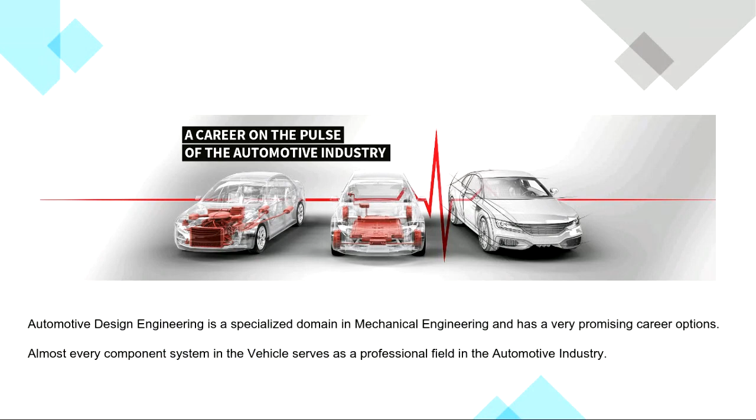So I'll come to some categories I've made. This isn't everything, but some main points from a career point of view. Take for example an automotive company like OEMs - original equipment manufacturers - Maruti, Tata, Mahindra, Renault, etc. They have broadly many departments, but automotive design engineering is mainly concerned with the top 5 or 6 categories I've categorized here.

So: research and development, then quality control, then supply chain, production of course, and product planning and control - it's called PPC. So, research and development.

Some of you have a very keen interest in research and development. Some of you have good skills communicating with suppliers or in marketing. Some of you have great interest in managing things and making things possible. Some of you have interest in managing people, making things happen in a proper, strategic, planned way - that's production and production planning and controlling.

It's called market research, and deciding what products need to be launched, etc. As I've highlighted here, let me bring the pointer in. I hope you can see this pointer. Okay, I was just trying it.

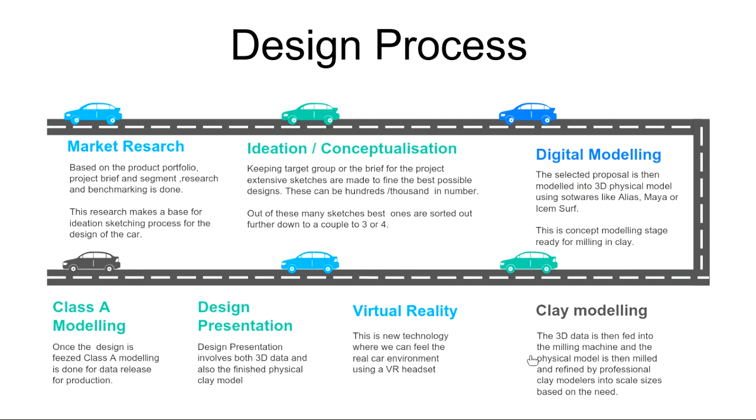So I hope you've understood this brief quite well. Now let's go talk about the processes.

So how is India doing about car buying things? Most of the people in India have multi-car homes, like two, three cars. Not most, but there is a group of people that have multi-car homes, and there is a group of people who use combined car pooling, car sharing.

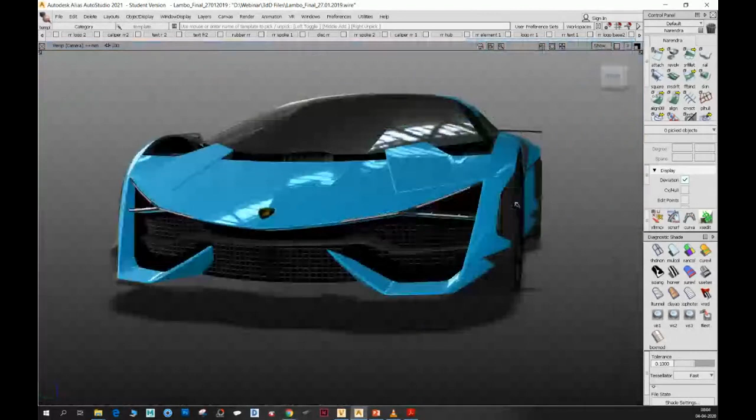Maybe one of you can write in the comment box if you can see the screen movement, can you see the model there? So this is the software I was talking about, and you can see there is a model.

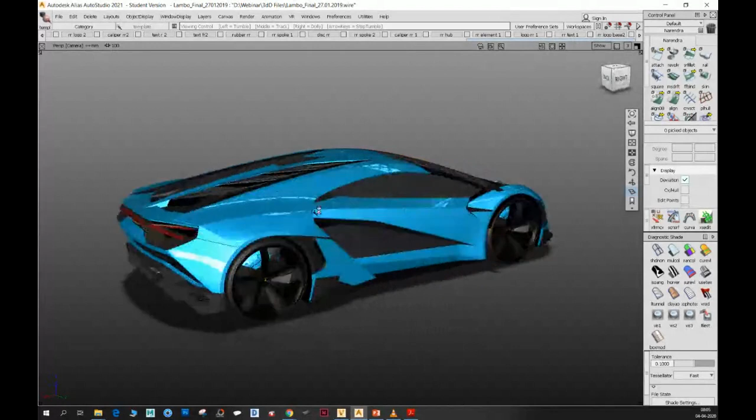This was a Lamborghini personal project. I have modeled it, designed it like this, and this is what we do in 3D modeling. So this is what I mean.

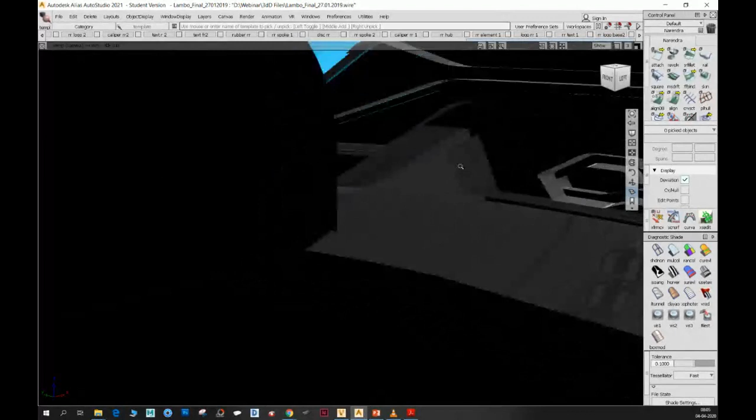So I would show you here the lines, now you can see the edges there. So these are all surface modeling. I was talking to you about surface modeling before. There is solid modeling and then there is surface modeling.

So for example, if I pick up this surface for you, and I will show you what is inside. You see, there is nothing behind it. It's just one surface, zero thickness.

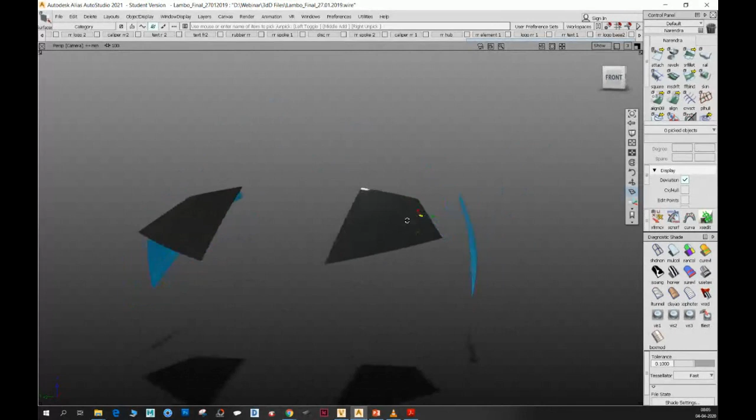And then later on when we go to production, this work is done by the engineers. They do it according to the production parameters, if you want a 3D print or something.

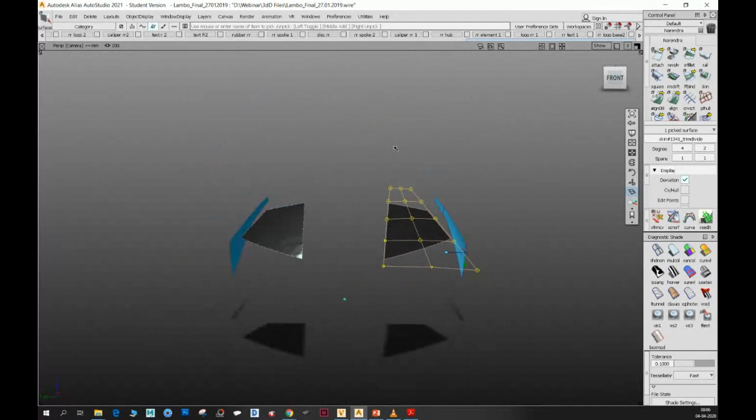So this is the surface modeling, and if you open the technical things in here, you see there are a lot of control points. So we have to design surfaces, you cannot just pull out, and I will show you here.

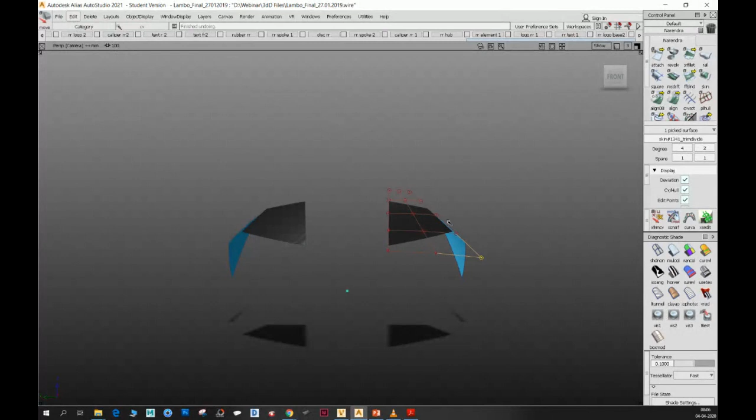For example, this control point, I will move it like this. You see, you can move it like this, and you see the behavior change in the surface. So this is how we do it actually. In design, you have to do 3D modeling based on the design flow, you cannot just do it randomly here and there.

So this is the Autodesk Alias software. I think 70-80% of companies are using the same software to make their models. So I hope you got an idea how it works.

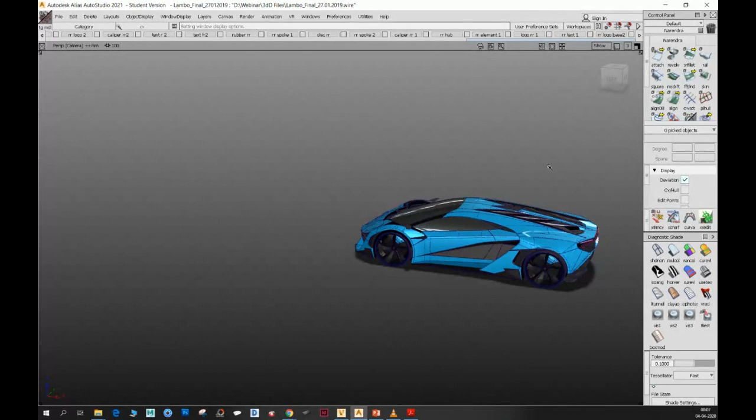And the second thing, the same model, how do we 3D render it? So this is another software, it's called VRED, we call it visualization, 3D visualization. And it's the same model I showed you before, and you see the difference in the shaders and reflections. This is more realistic, you are giving the real 3D feeling in here.

So we have, for example, if I show you here, just to show an example - we have different materials, you can see here, different kinds of materials. And then if I pick and drop, you see there's a material, a metallic body paint, and we just drop it in here, and then it changes the color like this.

So this is what I mean, you have different materials, it's like rubber, plastic, and everything else. Yeah, glasses, you have a glass effect.

So it's a long process actually, it takes a lot of time. For example, if I want to make a high quality JPEG of this, maybe it will take a couple of hours to make one single image. It depends on the performance of your machine, on the configuration of your machine to process these kinds of images.

And then after making the image out of this software, we have further development in Photoshop. Then you do some Photoshop touch up, some fancy things I would say, you do it in Photoshop.

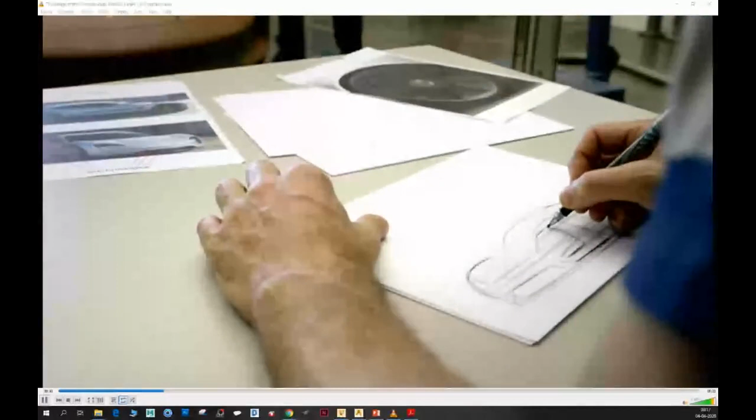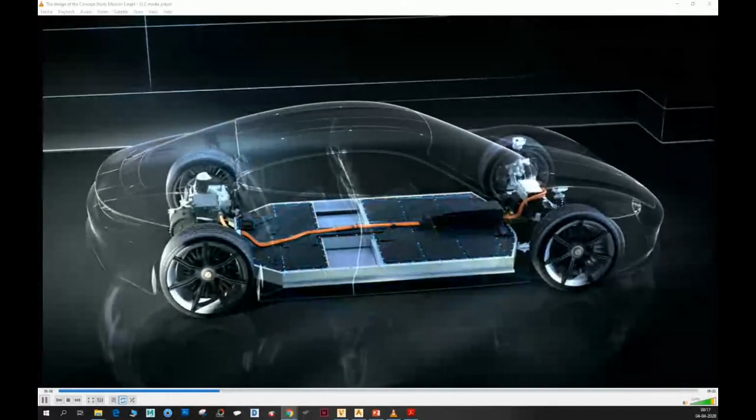This vehicle is Porsche's answer to the questions associated with the future of electric mobility - our Porsche Mission E. This concept car is a truly fantastic challenge for us because it's our first electric sports car. You're commissioned to do a job, in this case to develop a 4-seat sports car with an electric drive system. Then you start producing sketches as a team, and the sketches are shown in presentations made at specific intervals. After a sketch is selected, a 1:3 scale model is produced. When defining the basic concept of the vehicle, you start by setting its proportions, then figure out how to actually build it. We built a basic chassis and combined it with electrical components from the Boxster E, so in the end we had a demonstration model that could be driven.

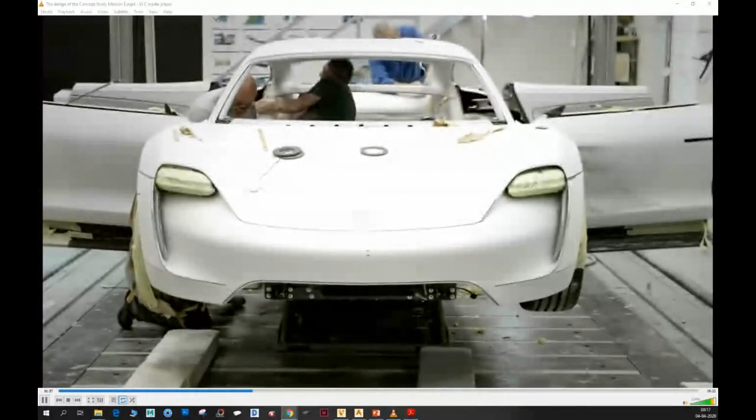It was very important to us to create typical Porsche proportions. We were able to design an extremely low front end because there's no engine in front. We also didn't need huge air intakes, so we designed everything in front in a very clean manner, almost like the old Porsche models from the 1950s, 60s, and 70s. We then mixed this with the wonderful shapes of the 919, and creating this combination of a race car and a carefully designed vehicle was the best part of the job. One thing we thought about was how to attractively integrate an air curtain to guide air around the front wheel. This led to the front-end design we chose, with the classic round Porsche nose flanked by two intakes that let air pass under the headlights towards the wheel arch.

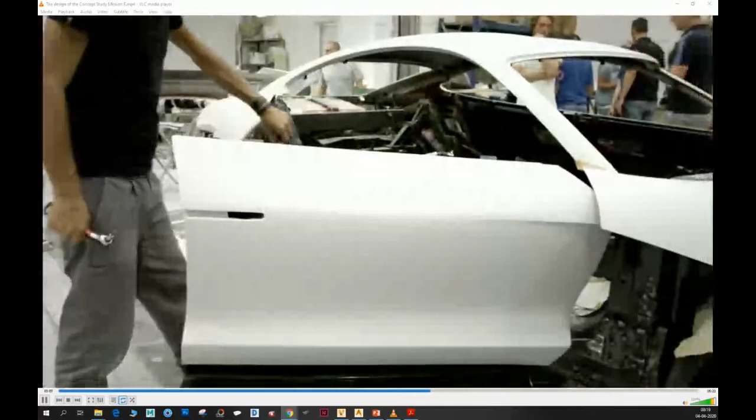First of all, the vehicle is clearly recognizable as a Porsche. But we designers wanted to go a step further and see how the Porsche design language, especially a Porsche electric design language, might be developed further. Our intention was to be somewhat provocative with some parts of the vehicle, but just one look at its proportions and general design shows it's clearly a Porsche. We also addressed a couple of strategic issues important to us - the 4-point lights in front were important to me, and the arc of light was the main issue in the rear. For us, the door concept is a typical sports car design, one without a frame for the first time. Convenient entry in the rear is ensured by rear-hinged doors, and the fact there's no B-pillar makes for perfect access in the rear.

The vehicle is very special for Porsche, as it's a new icon. One of our most well-known cars is the 911, of course, and this vehicle will carry into a new era all the things the 911 has been famous for throughout the decades. That's why we came up with some very special things for the interior as well.

We tried to focus on various key aspects, one being that we wanted to achieve an entirely new type of interaction with the vehicle. We utilize gesture and eye recognition systems to enter commands for the car. We tried to create a new type of holographic display - you can input commands on the front passenger side and via the center console. This is already a standard feature in the 918 today. Besides that, we did something new with the seats - we've got lightweight bucket seats with a fairly sporty design. Then there's the craftsmanship, of course - the quality of materials used truly conforms to the highest standards, just what you'd expect from a Porsche.

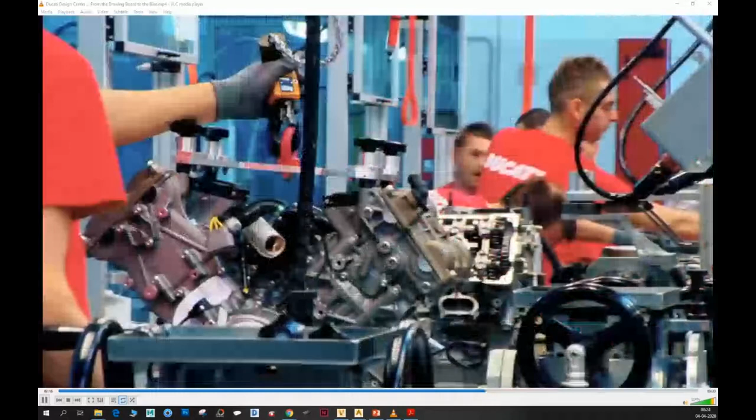Ducati, the most alluring Italian temptation on two wheels. Elegant design, Italian passion. Introducing Andrea Ferraresi, head of Ducati design. Under his leadership, a Ducati gets its unique sporty design. They're created here in this room in Borgo Panigale, Bologna, quite traditionally, almost like a painting. We start with black and white pencil-made sketches, then we scan them, we load them in a computer, and we finish them in Photoshop for the final presentation. After the sketches, we arrive at the second stage, the so-called proportion model. This is not a real bike, it's a maquette, a one-to-one scale maquette. After that, we have the clay model, and after the clay, the final stage, the so-called clinic model. And of course, at the end, we have the real bike. Going from the sketch to the clinic model takes 2 years, during which his 20-member team designs things like the Ducati X Diavel, for example. Color and form are defined down to the smallest detail. The main philosophy is that our motorcycle must be real everywhere, so no baroquism on our fairing and no unnecessary part on our mechanical layout. This comes from the racing field, our racing heritage, to be as sporty as possible. Perfection, love of detail, elegance, sportiness, and very important, emotion - that's the DNA of a Ducati. Added to this are Italian flair and aesthetic sense. A Ducati will always remain a Ducati. It's more than just a motorcycle, Ducati is a feeling. The guy takes inspiration from everywhere, from racing, from what the customer realizes on their own motorcycle, and we take inspiration from nature, from fashion, from everywhere. Ducati and Audi - not only have they been a team since 2012, they also have a lot in common: the love of their products, the pride and passion that both Audi and Ducati employees put into their work. I think the similarity between the two brands' design comes out and is based on the common DNA, which is a sporty DNA. So both designs are adrenaline, muscular, fluent, elegant, and for both brands recognizable, of course. So both brands have a clear sports design. Ducati recently won one of the world's top prizes for design, the Red Dot Award for the X Diavel. Ducati is and remains the most alluring Italian temptation on two wheels, thanks in part to Andrea Ferraresi and his team.